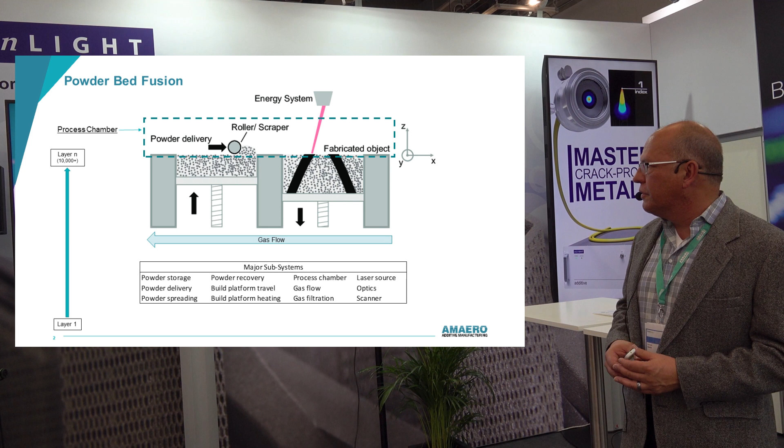So what we're here to do today, I'm here to talk endlessly about metal additive manufacturing. You all showed up to see the previous presentation, but you're sticking around to listen to me, and I appreciate that. So a quick review of laser powder bed fusion, which is the modality that we're here to talk about.

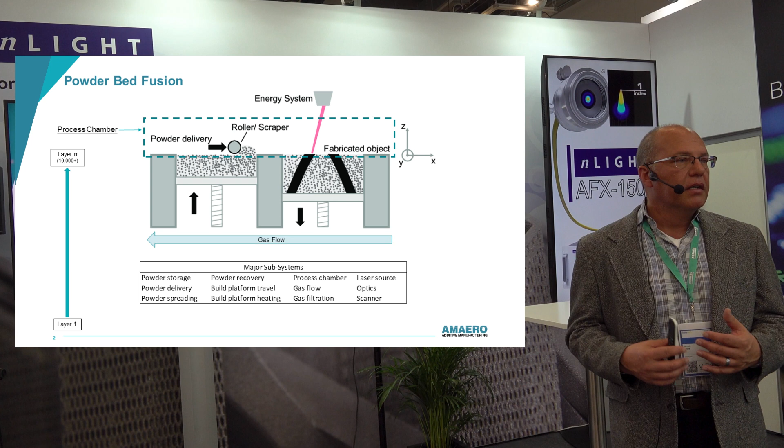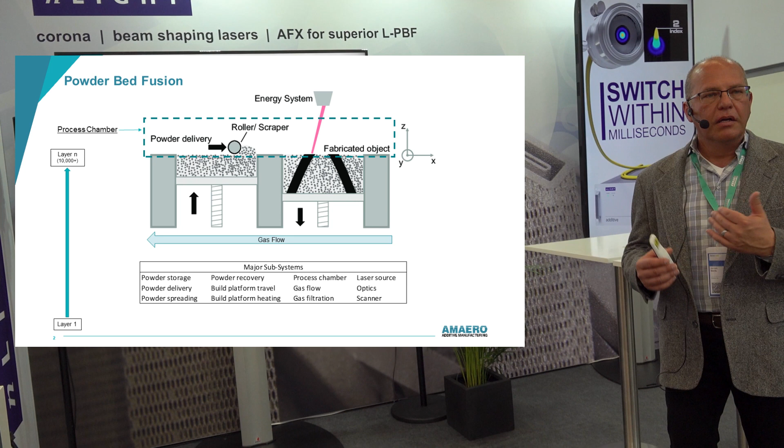There is a process chamber. It usually has a non-oxidizing atmosphere in it, in the form of a vacuum or positive pressure inert gas. With lasers, it's usually positive pressure inert gas. There is a powder conveying system that spreads a thin powder layer on the build platform. The platform is scanned by an energy beam, which can be an electron beam, a laser beam, an alien death ray, something, but there's going to be some beam that's focused, has optics, has scanning, has a lot of complicated contraptions that are making this all possible.

In concept, this is all very simple, but the difficulty is in the details. Anyone can print a part that resembles what your customer wants, but to print the part that meets dimensional tolerances, has the right surface finish, is reproducible and repeatable, not only on the same build plate, but build after build after build, month after month after month. And we're doing layers, hundreds of layers, thousands of layers, 10,000 plus layers, builds that last days, weeks, even some go on for months.

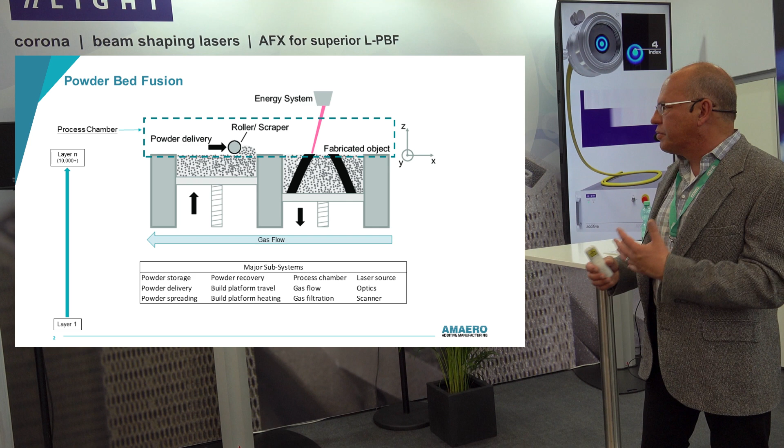The biggest challenge is that within this printer, it is an assembly of a lot of complex subsystems that move powder, convey powder, spread powder, heat the platen, move the platen. There's process gas flow, there's process gas filtration, there's the energy source, there's the scanning. All these subsystems have to work together, and they all have to be equally good.

Now, we're working with this amazing laser, AFX-1000, a 1,000-watt multi-mode laser. It is an amazing tool to work with, but what we're going to find also is that if all the rest of the subsystems aren't as good, it gives us a lot of challenges. And this is what's been at the root of the slow advancement in laser powder bed fusion.

We had 1,000-watt lasers years ago, but we couldn't use them. Our scanners didn't have good enough coatings to take that much power. Our lenses heated up and would distort under that much power. We generated so much soot, condensate, and weld spatter that our gas flow system couldn't deal with it.

As we went from like 200 watt to 400 watt and higher, there was always a leap forward in laser power and then a step backwards as one of the subsystems wasn't up to par. And then we'd get that engineered up to everything being equal, and then we'd do something stupid like put two lasers in there, and now our gas flow problem was doubled. And I'm going to talk about gas flow a lot today, even though we're here to talk about laser.

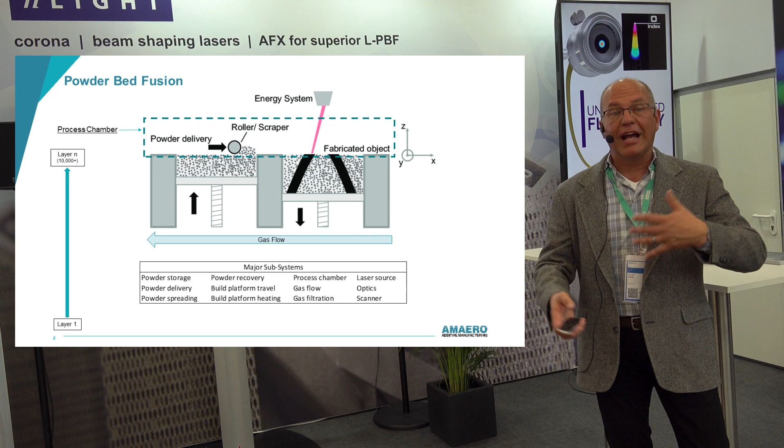So the process of laser powder bed fusion is very simple. We all did it as children. It's like coloring in the coloring book. The picture is our CAD, and then we go into our crayon box and we pull out that really sharp crayon, and we meticulously draw along the inside of the picture and create the outline.

We call that contouring. Then we go back in the crayon box and we pull out a real blunted crayon that has lots of surface area, and we just fill in all the space, going up and down, overlapping our layers, moving from left to right. That's what we're doing in laser powder bed fusion.

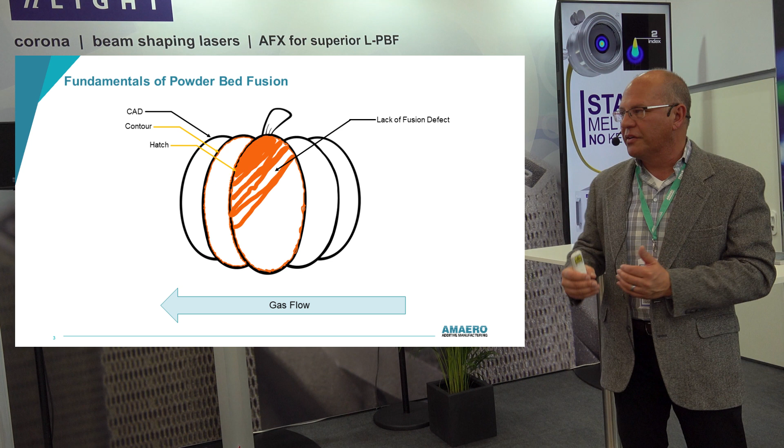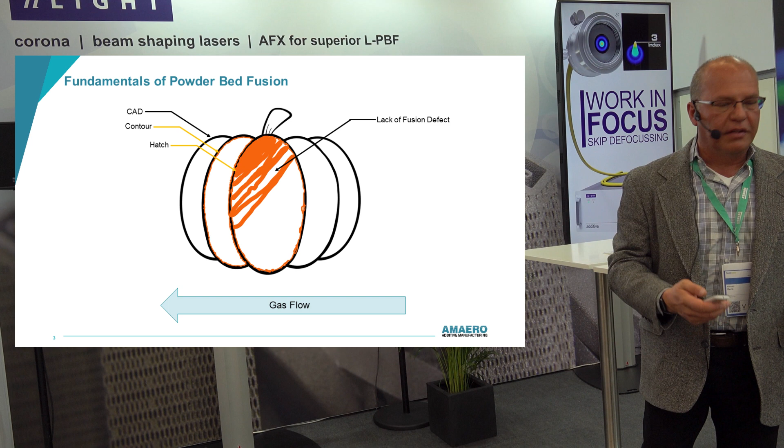And we have to do just like in coloring, make sure we get to the line but don't go over the line. Make sure that our hatching, which is the filling, goes to the contour, doesn't go over the contour, doesn't fall short. And where we have gaps, where we would have had those white spaces when we colored, we call that a lack of fusion defect, and that will make a bad part or a good looking part that will fail later in service. And again, gas flow. We're going to keep talking about gas flow.

So more sciencey, how this all works. We have our spot size, which we're normally working with about an 80 micron diameter Gaussian spot. We have a fixed spot.

It's a good compromise size because it lets us contour with good surface finish, and it lets us print details of pretty good feature resolution down to about 0.5 millimeter, and it's kind of okay about filling in all the bulk, but having just one spot size that does not fit all applications is a challenge.

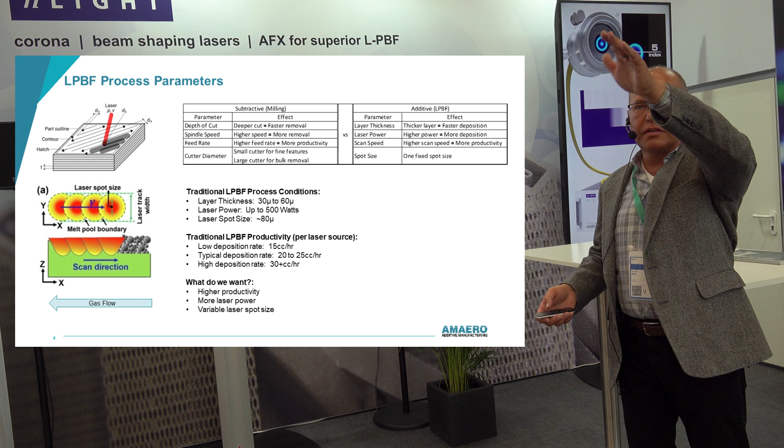And we follow this tool path, scanning up, coming over a little bit, overlapping, scanning down, scanning up, scanning down, constantly overlapping. And the need to overlap a lot is also cutting into our efficiency. We have some other problems that are going to happen, and we'll talk about in a moment.

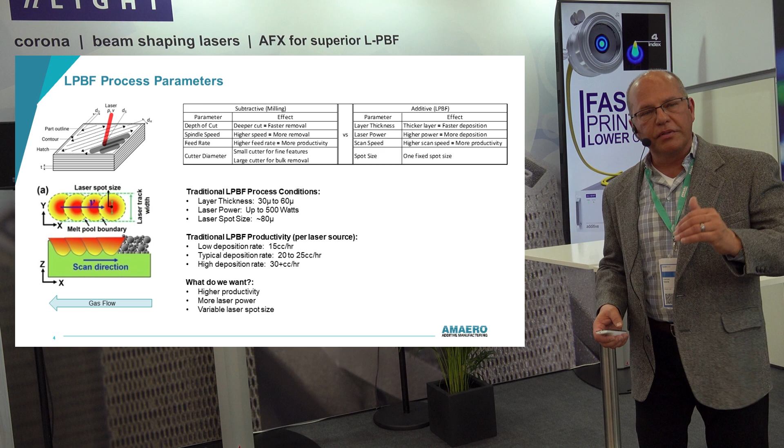But in terms of how this all works, we can also think about it compared to subtractive manufacturing. We talk about feeds and speeds; in printing, we call it parameters. So the depth of cut in milling is just like our layer thickness in printing. The deeper the cut, the more material we can take away. The thicker our layers that we can print, the more material we can deposit.

Our spindle speed addresses how much material we can remove per minute or second, and the laser power lets us deposit more material. Our feed rate, moving the part past the mill, increases productivity, and our scan speed, if we can scan faster, increases productivity.

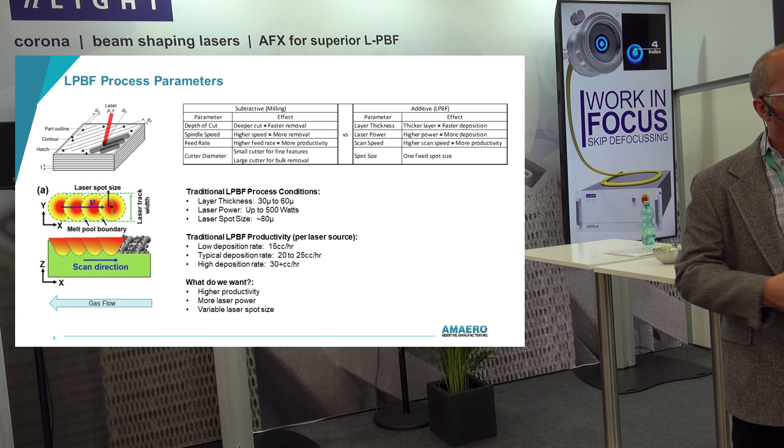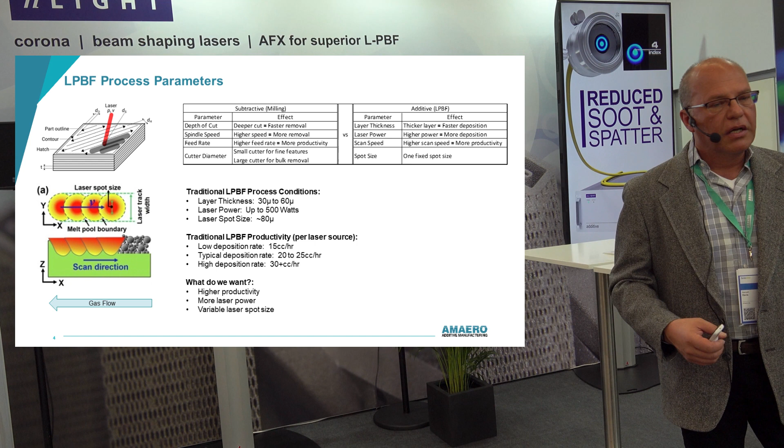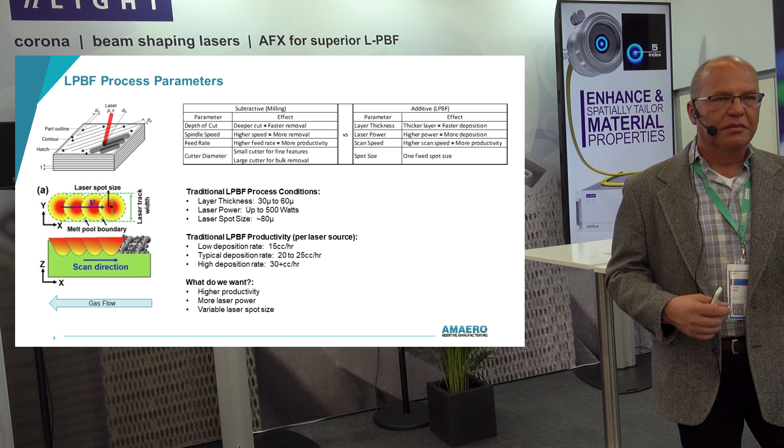Where the analogy falls apart is that in milling, we can put in a small diameter mill and mill a very fine feature, then change to a large diameter mill and take away a lot of material. On the laser side, we only have one spot. We can't change it historically, but that's what we really want to do: small spot for fine features, large spot for massive deposition.

Traditionally, our printing is in layer thicknesses from about 30 to 60 microns, up to about 500 watts. We have more powerful lasers, but with an 80 micron Gaussian spot, if I go over 500 watts I'm just going to keyhole, drill deep into the metal, and create lots of porosity and defects.

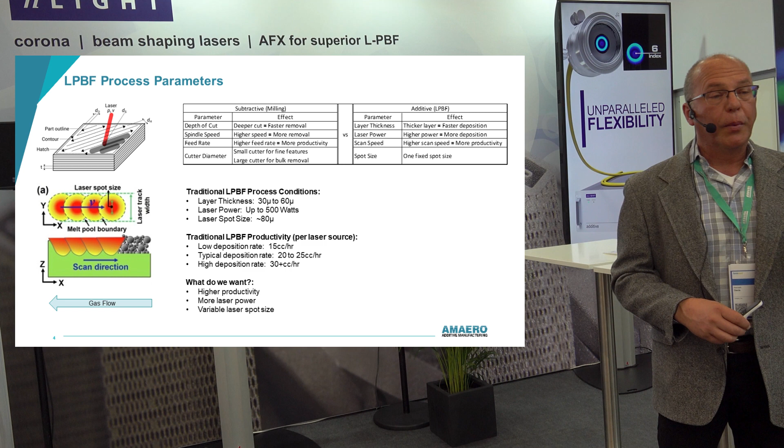And if we're sending a lot of power in, we're generating condensate. We're not selectively laser melting, we are selectively laser boiling. We are boiling the metal, generating lots of vapor. It consolidates in the chamber in the form of very fine particles, submicron particles, pyrophoric particles.

They are jumping around in the atmosphere, causing laser obscuration by getting in the way of the laser beam, which results in defects on the melt bed. And then we're also creating a lot of ejection of molten material, weld spatter.

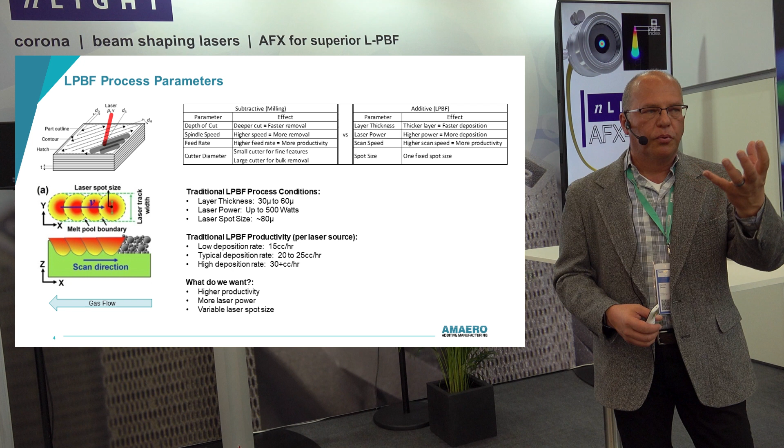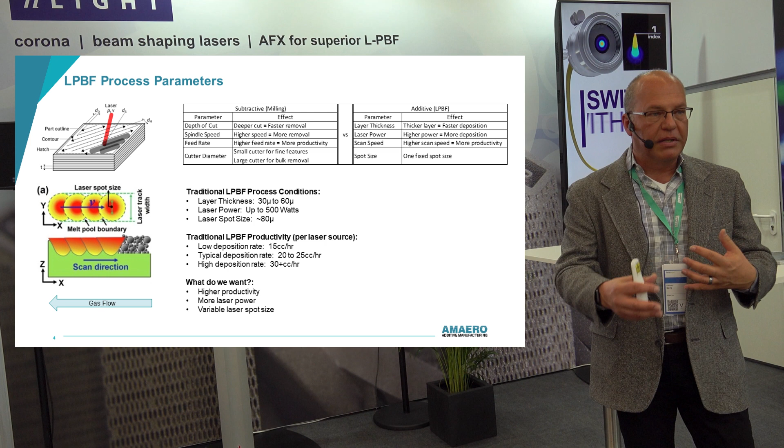And as that jumps out of the melt pool, it coalesces into a very large ball with a gas pore in the middle, drops back down on the bed, and we might weld it in, we might not. It's kind of big, and it's going to have a void in the middle of it. So this all generates a lot of defects.

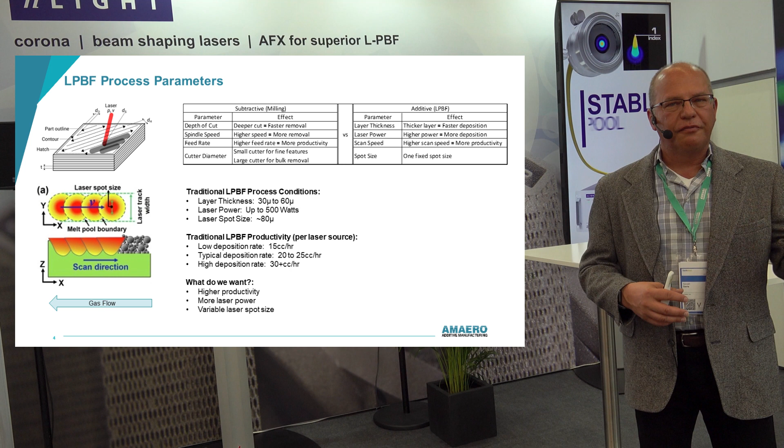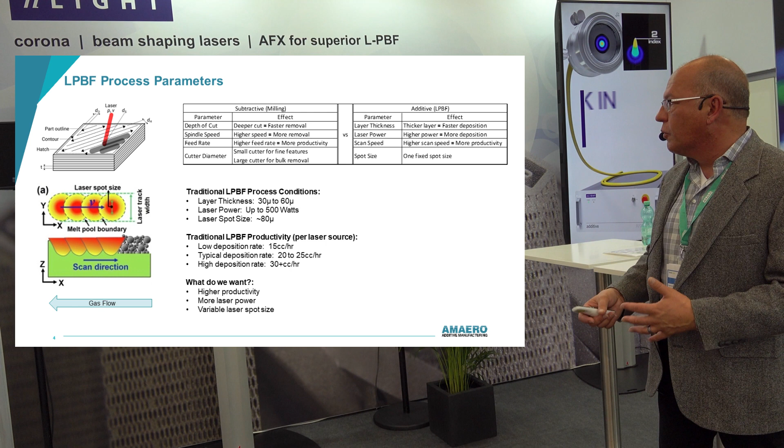From a productivity standpoint, we deposit between about 15 and 30 cc's per hour, nominally around 20. We'd like to be more productive, and that's always our goal, why we want to put more laser power in. So what do we want? We want higher productivity, more laser power, and a variable spot size.

So Wayne King did a lot of seminal research into what's really happening when the laser hits the powder, and we saw some earlier presentations today as his work has been taken on by a lot of researchers around the world. We used to think that the laser hit the powder, heated it, melted it, consolidated it, and then the melt pool would draw in additional powder around it.

Turns out the beam hits the powder and pretty much blows the powder out of its way. Imagine the floor was covered in ping pong balls and we hit it with a fire hose - all the balls scatter. The laser is really engaging the substrate below the powder, melting that, and then drawing a bunch of powder in around it.

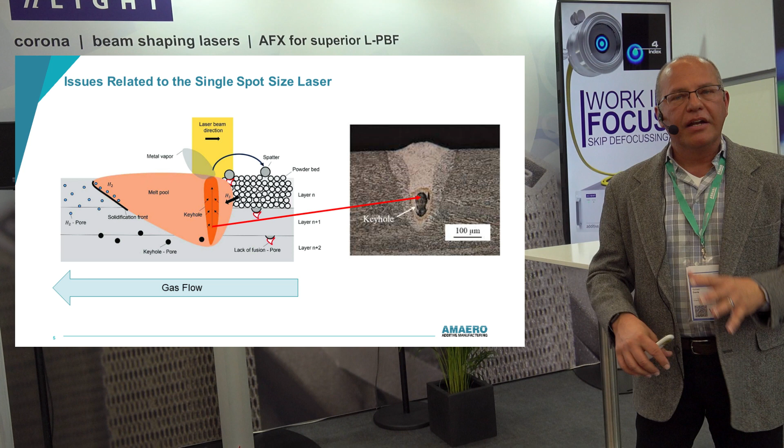And then it advances, leaving cooling behind it and generating again the metal vapor, which is bouncing around up in the chamber. Hopefully the gas flow is taking it towards the vent, and it's creating weld spatter, which can jump either behind the laser or in front of it. We want to get all that stuff out of there - we don't want to generate it at all, but we want to be able to get it out.

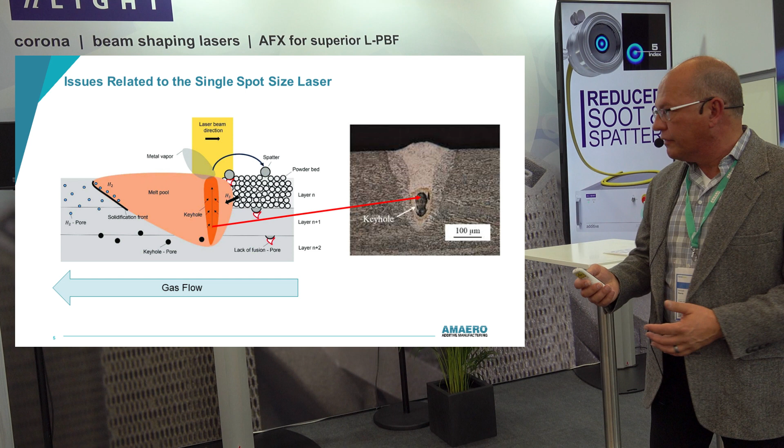And we can make keyhole porosity with this Gaussian spot, and we want to avoid that. So we had been printing, or trying to print, a part at Amaero for a customer.

It was an H-13 tool steel. Most people think that is an unprintable material because it's very crack prone, and it's crack prone because it does not like extreme thermal gradients. But think about printing: we take warm powder, convert it to boiling metal, and then back to consolidated hot metal in like one second. That's a very extreme thermal gradient.

So how do you print H-13? Well, you increase your plate heating to its maximum potential, about 200 C, spread very thin layers of powder, 30 micron, pour in a lot of laser power, which means we're generating a lot of vapor, and then you scan very slowly so that it doesn't cool off quickly, and that's how we reduce the thermal gradient.

So we generated a lot of condensates, and we created horrible productivity. We're scanning at like 600 millimeters a second, which is half of a normal scan speed. You do that, and you can create really nice-looking H-13 microstructure.

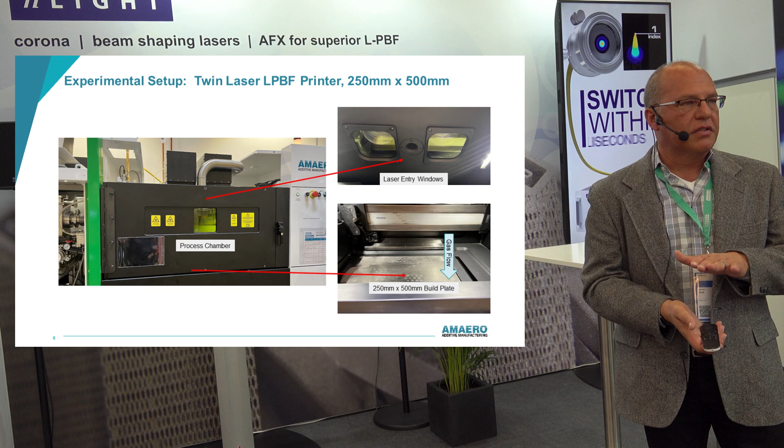But as we're printing this part, and it was a very large surface area in this machine, it was almost over half of this build plate, 250 by 500 millimeters. About 15 millimeters into it, we realized that just the volume of vapor we generated was going to overwhelm our filter. At about 20% into this build, we were going to clog the filter and we were done.

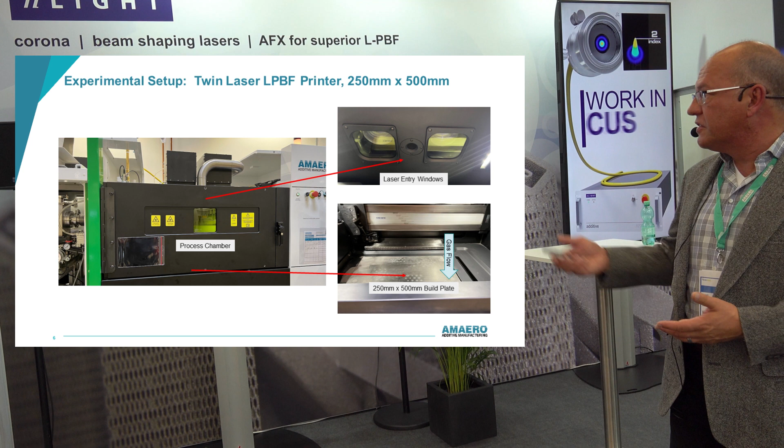So we never got to print the part, but it drove us to ask, what about this ring mode laser? What can that do for us? And we got an opportunity to simply pull a laser out of one side of our machine and put the AFX in. So this is what happens when you put the beam profiler under it.

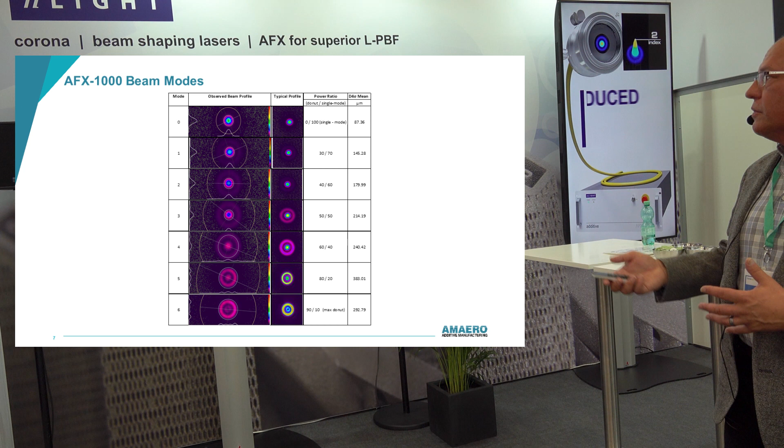We get in mode 0 a more traditional Gaussian spot, and as we go through modes 1 through 6, we get this really interesting ring that's hotter on the outside and a nice cool spot in the middle. And that's going to really help us avoid that whole keyhole process.

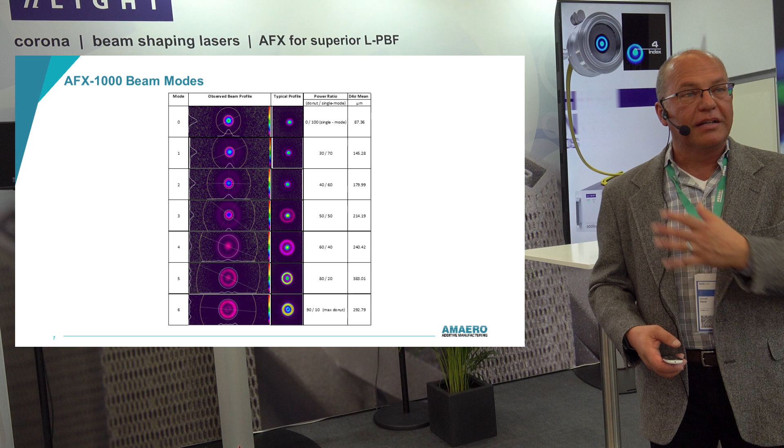Now, a smart person probably would have done a DOE, stepping from mode 0 through mode 6. I'm kind of crazy, so I went straight to mode 6 because I wanted to compare. I know how bad my life is in a Gaussian spot. I wanted to know what this ring can do for me because it's 300 microns and it's hot on the outside and cold in the middle.

So doing some DOEs, and this is hatching only, we didn't do any contouring. The first DOE, we left a lot of the process conditions alone: 30 micron layers, very slow scanning. And in order to look at the microstructure more easily, we just alternated our layers by 90 degrees.

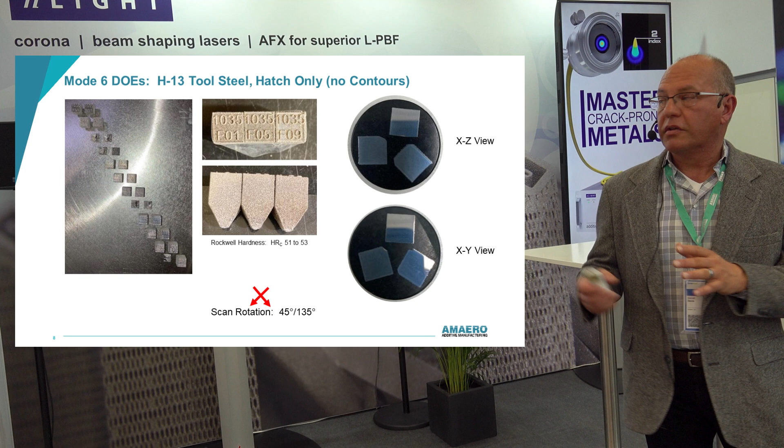Normally we do a 67-degree rotation, but by alternating 90 degrees, it was easier to look at the microstructure and see what's going on. Also, that meant that each layer, because we printed 45, 135, each layer engaged the gas flow at 45 degrees. So every layer was essentially the same process condition.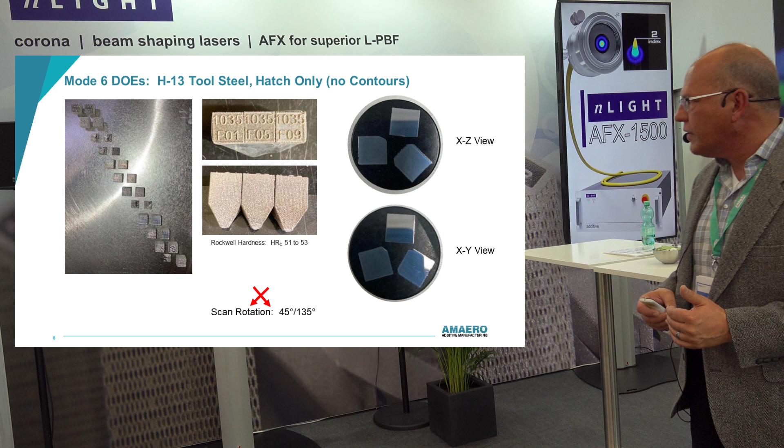And I mean, just these surface finishes alone, again, a 300 micron ring, no contouring, we got great surface finishes. All that labeling was done with the ring also.

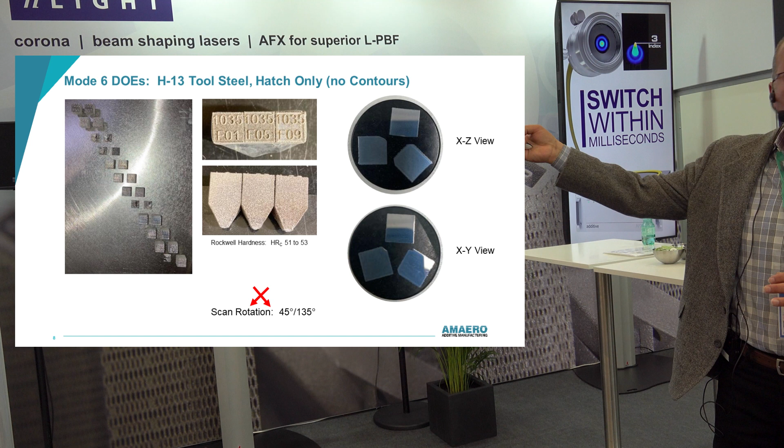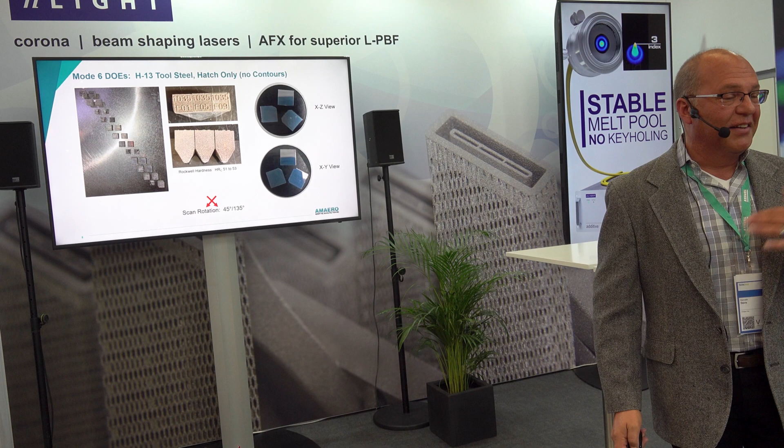And, oh, by the way, H-13 prints file hard. It's Rockwell C53. So all these DOEs, I have file hard steel that I have to section and do metallography on. So on the far left, that's the traditional melt pool that we're used to seeing, these very deep bells.

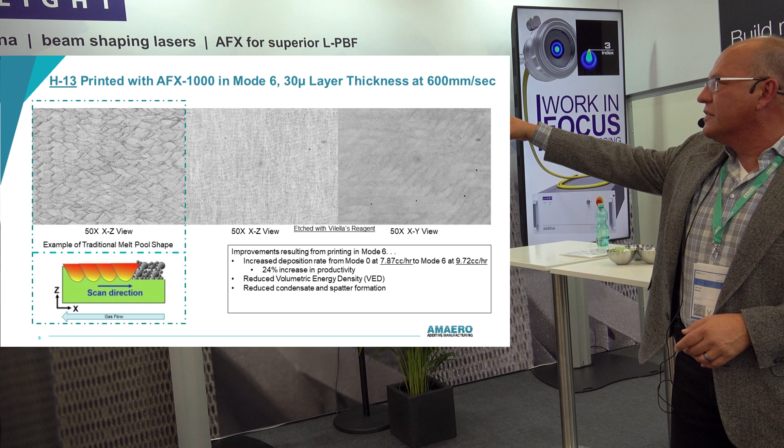And in the middle here, this is the H-13 in the XZ and the XY view. And what you see are these very, very shallow melt pools. They're not at all the deep pool that we're used to. There's no keyholing that's happening. And it's a nice wide, shallow pool, which means we can widen the hatch spacing.

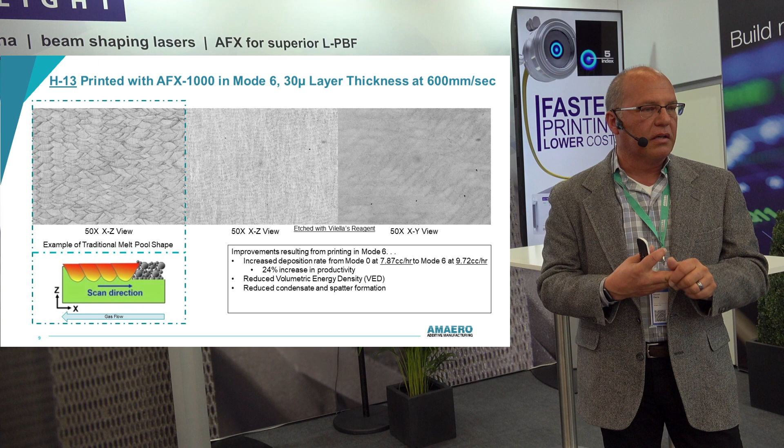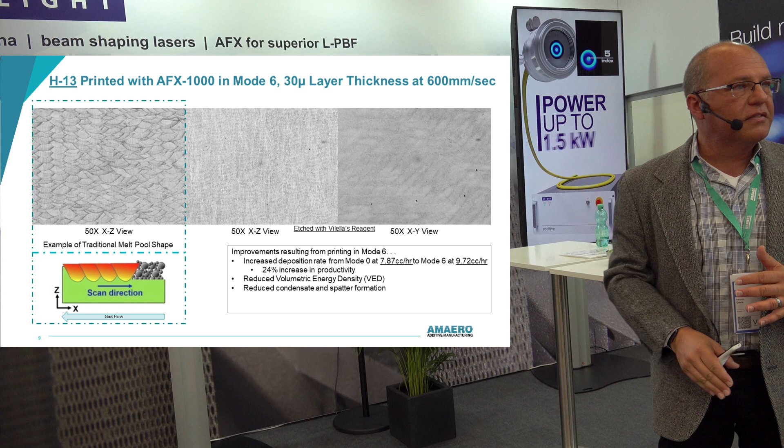It allowed us to reduce the total laser power because we weren't wasting all this Gaussian power in the middle. So we reduced the laser power, widened our hatch spacing, reduced the condensate generation, lowered the volumetric energy density, and we took, I mean, this was impressive. So H-13 is very unproductive, 7.8 cc's per hour. We got it up under these conditions to 9.7.

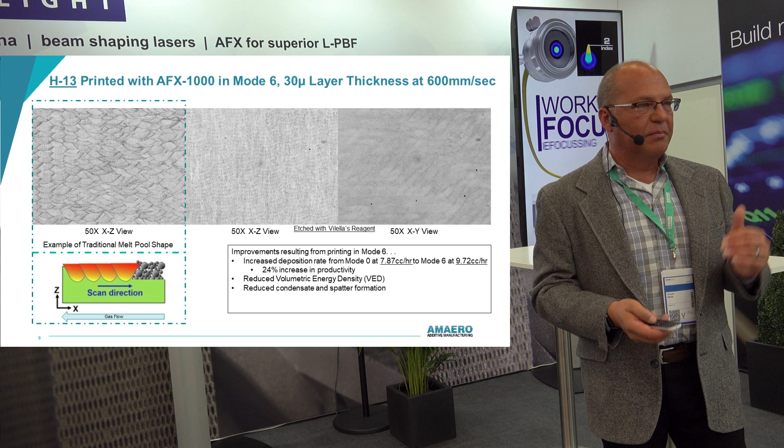That's a 24% increase. But I was just so amazed at how well this worked that I had to see how far I could take it. So I've never seen anyone print H-13 thicker than 30 micron layers, so I decided, well, we'll go to 50. What can happen, right? So we did a whole series of DOEs, going faster, pouring more power in, scanning thicker.

Scanning faster: I've never seen anyone who could print H-13 at high scan speeds because it wants to crack. So at 50 micron layers, 800 watts, 160 micron hatch spacing, mode 6 ring, scanning at nearly 1600 millimeters per second, we were depositing at 45 cc's an hour. That was 7 times more than we were depositing before. And that's almost twice what we consider a productive amount of deposition, even in a friendly alloy.

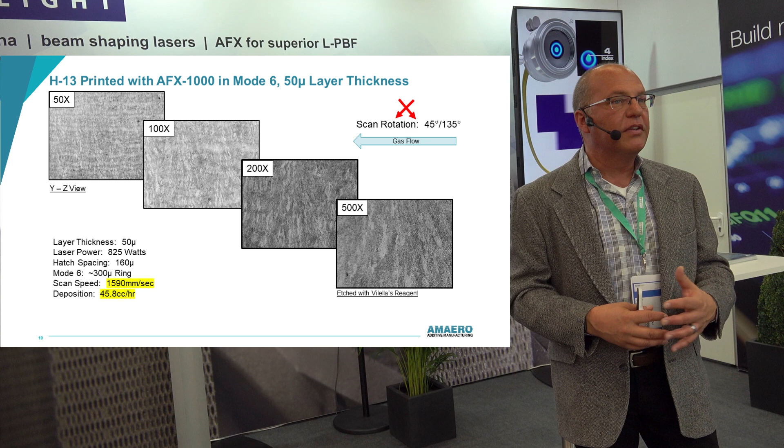But my dear friend gas flow and gas filtration - we reduced the amount of condensate generation by about 50% per unit volume of deposited material. But we deposited 7 times the volume per unit time, so we increased the total condensate in our chamber by 3.5 times, which means my dear friend gas flow and gas filtration let me down.

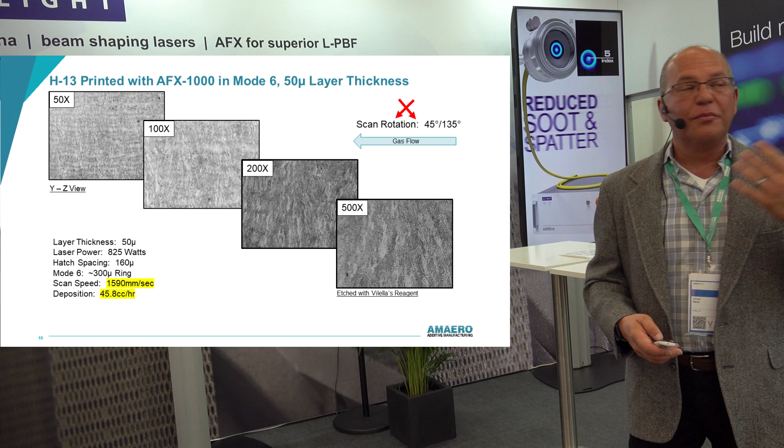And this is why the rest of the subsystems have to catch up with the laser. In this particular DOE, as we were getting very aggressive with our parameters, the top left cube was the less aggressive parameter, the bottom right cube is the more aggressive, so it should have gone from good to less good as you work your way down.

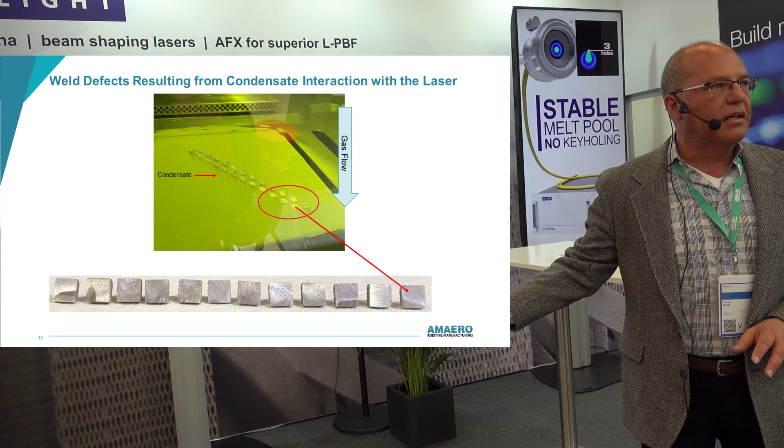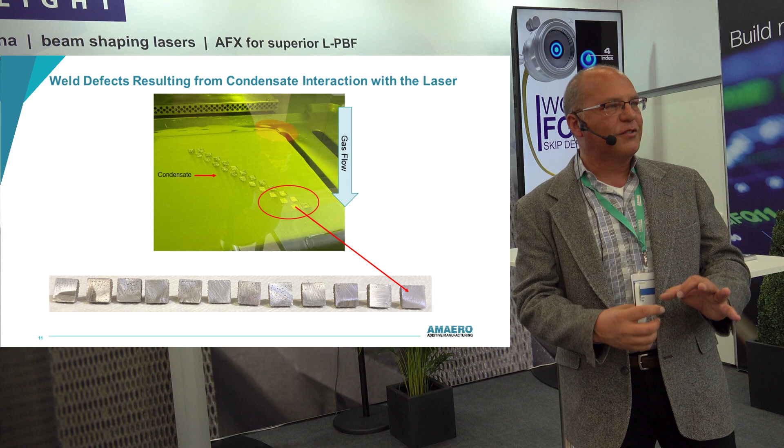But you notice there's a lot of condensate on the bed, and that's because of a lot of irregularities of the gas flow within the chamber, a common problem in laser systems. When I sectioned all of them, they were all full of porosity, caused by laser obscuration from the condensate, except the one in the bottom corner. That was my most aggressive parameter, but I had good gas flow in that location, so I had beautiful material.

I switched to 718 because it's a friendlier material, and I wanted to get crazier with all this printing. So here I'm printing 718 at 80 micron layers.

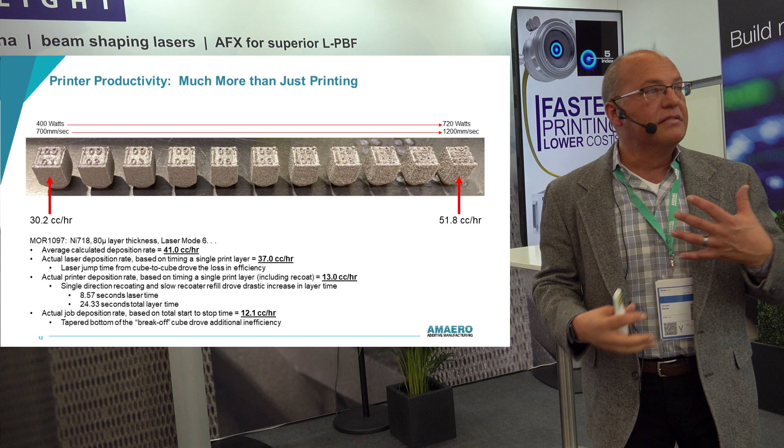In this particular DOE, the volumetric energy is the same for every one of those cubes, but we have low power, low speed on the left, high power, high speed on the right, and an increase in deposition rate from 30 cc's an hour to 51 cc's an hour - again, like double the normal high deposition rate.

You'll see that the surface finish doesn't look as good as we go from left to right, but that shouldn't fool you into anything. That's all because I'm not contouring, plus my friend gas flow.

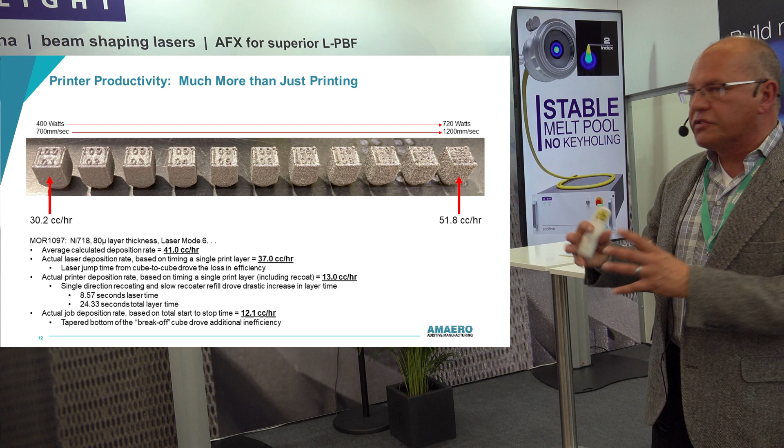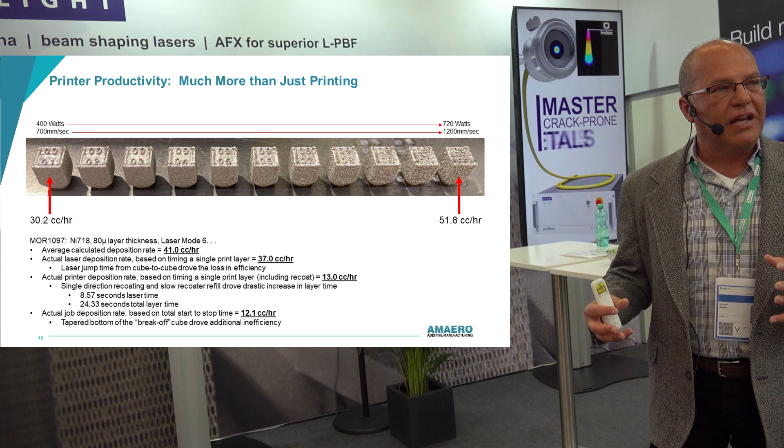If you just calculate this out, this DOE should have been depositing at an average of 41 cc's per hour. If you just time it, laser on to laser off, it was actually 37 cc's per hour. That was because of the jump time from the laser melting one cube to the next. Then, if you measure one full layer, scanning time and recoating time, we're now down to 13 cc's an hour because the lasing was 8.5 seconds, but the total layer was 24 seconds - it took twice the lasing time to do the recoating.

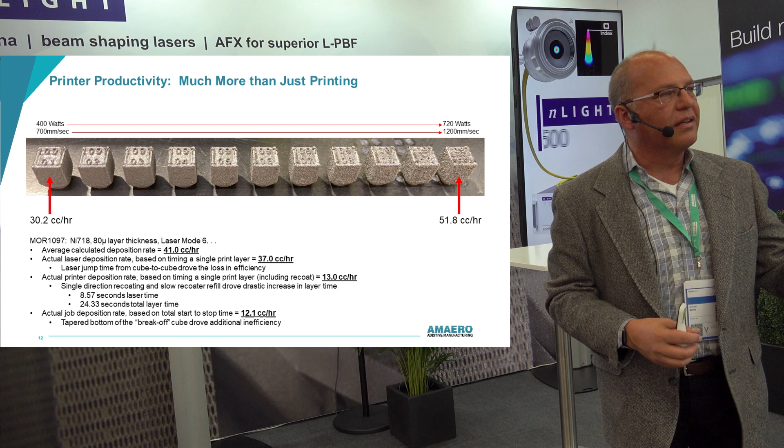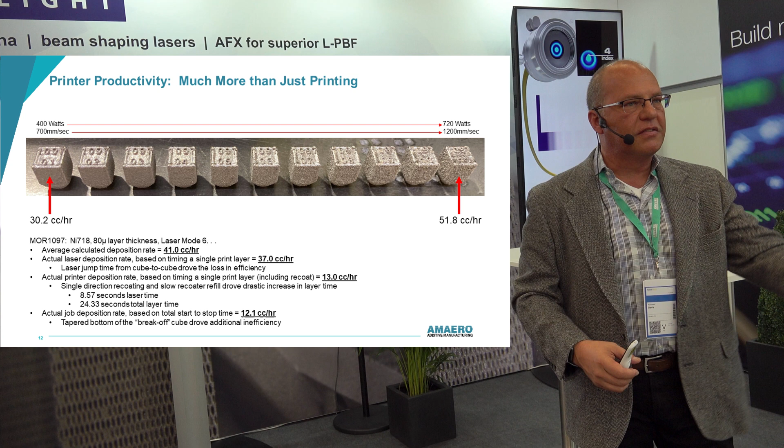And then when you calculate the whole project out from start to finish based on the whole volume, this project deposited at 12 cc's an hour. So the laser is giving me 41 cc's an hour, but the rest of the subsystems - how they work, how they're programmed, how they've been planned and designed to act as a system - they let me down. They gave me 12 cc's an hour despite the productivity of this laser.

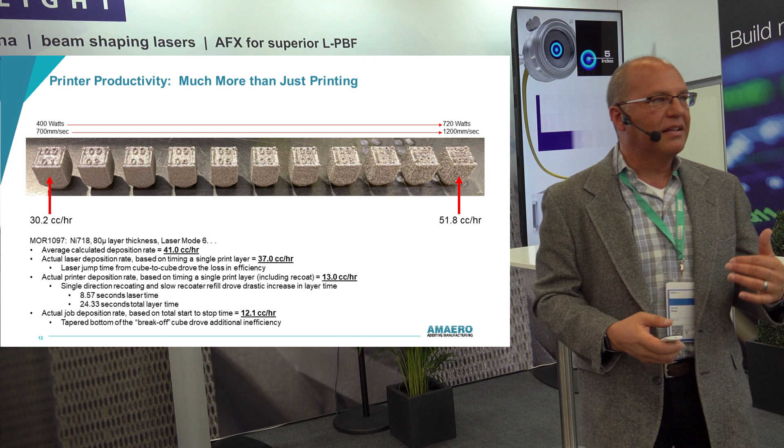By the way, you would think that the cube on the left has great microstructure and the cube on the right probably has a bunch of porosity in it. Actually, no - they all look fantastic because this gentle ring, hot on the outside, cold in the middle, takes away that Gaussian spot, takes away that deep keyhole effect, and gives us a much broader processing range from our materials.

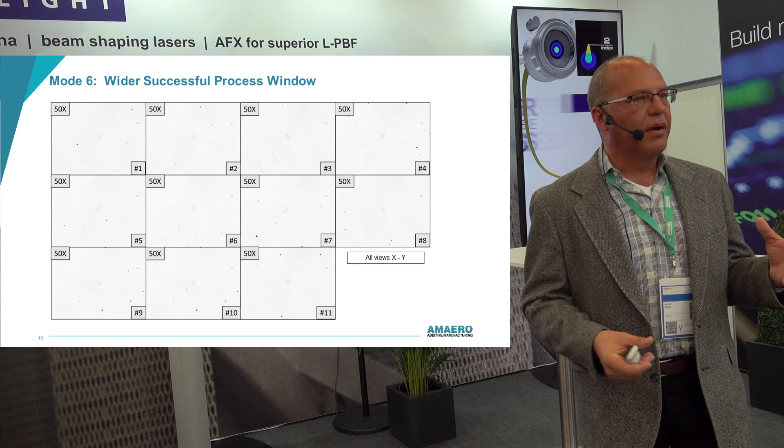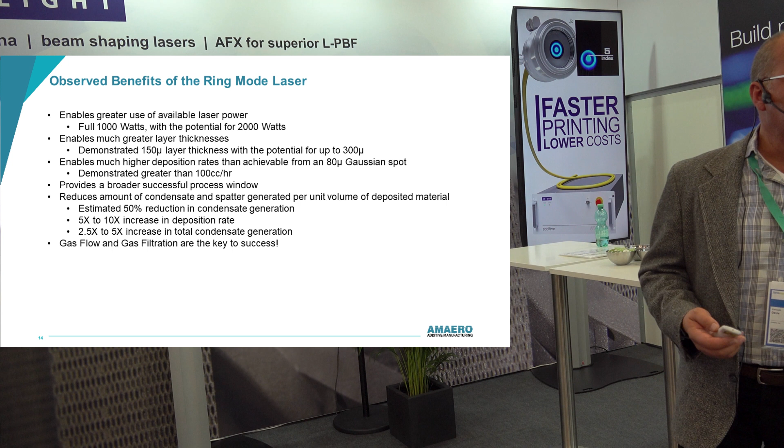So, what are the benefits that we've observed? We can use the full 1,000 watts of this laser, and I could probably actually use 2,000 watts. I've deposited in layer thicknesses as high as 150 microns. I couldn't get there yet, I'll try, but I think I could get to 300 if my friend gas flow and filtration will be cooperative with me.

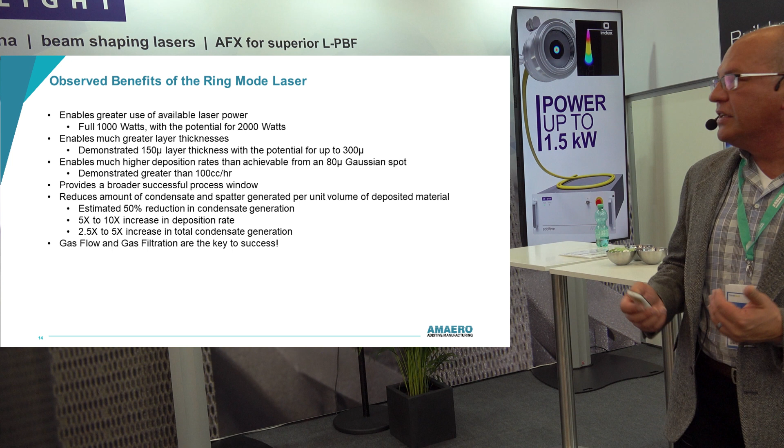We demonstrated greater than 100 cc's an hour. We probably could get to 200 cc's an hour with good gas flow. And again, the gas flow is the problem - half the condensate, but we're depositing 5 to 10 times the amount of material per unit time, so we're filling the chamber with condensate. Great tool, amazing laser.